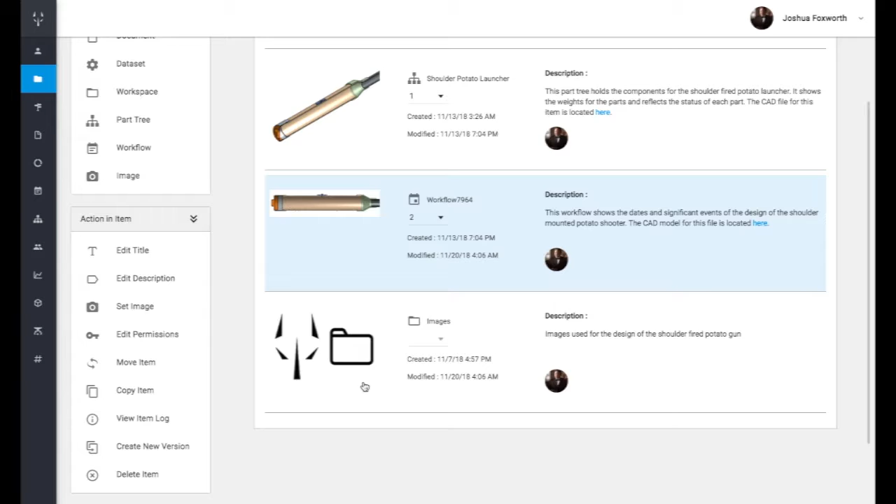As you can see, this is based off of a WikiHow that we've linked to. The WikiHow just shows you how to put it together, gives you some good introductory tips on how to do that. Our design is slightly different because we wanted to make sure that all the items the gun is made out of could be bought at a hardware store. Partly so we'd have the dimensions readily available, but partly just so we weren't just making something up, and you could actually build this gun by yourself if you wanted to.

Alright, so that link is in our description. Let's go over to our Onshape model. This is a really simple item to design.

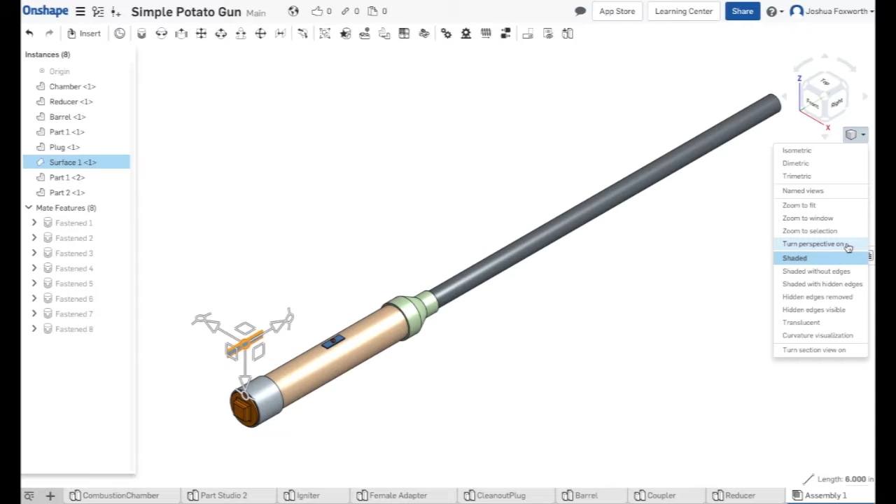We've inserted a plane here, and we'll go ahead and cut this in half by viewing by this surface. In Onshape, that's pretty simple to do. You've just got this surface here, you bring it into your assembly, you go to the view icon at the bottom there, you'll see the proper tab to view a cross-sectional view. So we'll click on that. Nope, I guess I didn't click on that. There we go. So this arrow will let you pull back and forth as to how far from that surface you're actually slicing into the model.

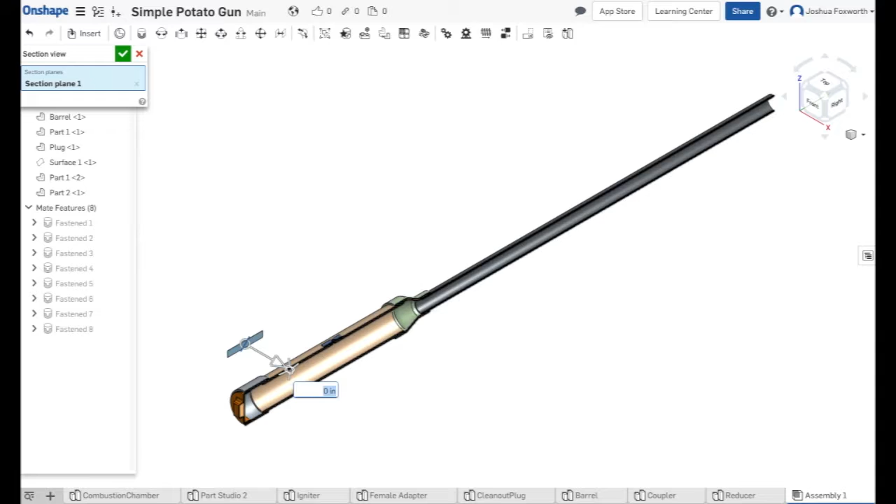Alright, so let's go ahead and set it at the center. Our design is pretty simple. You've got the barrel there at the end. At the opposite end, you've got the end cap, which screws on and off. You unscrew it, insert the propellant, spray the hairspray in, and then screw it back on.

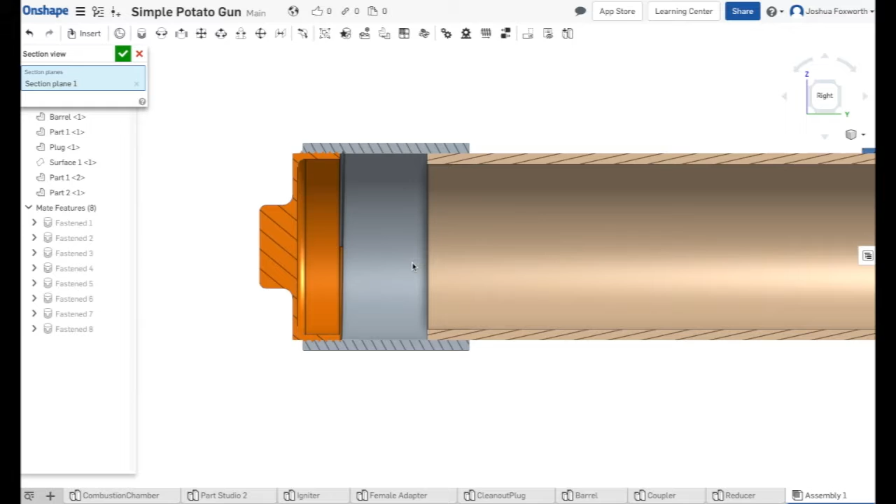See, click on this right there. You can see that it's threaded on both ends. There's that gray adapter that connects the combustion chamber to the end cap. The combustion chamber is in the light brown, the end cap's in the orange. We've got a hole in the combustion chamber for the firing mechanism, and there would be wires hanging down there normally. This is our reducer, the green part there that connects the combustion chamber to the barrel. And these are just glued on, so you don't see any threads there.

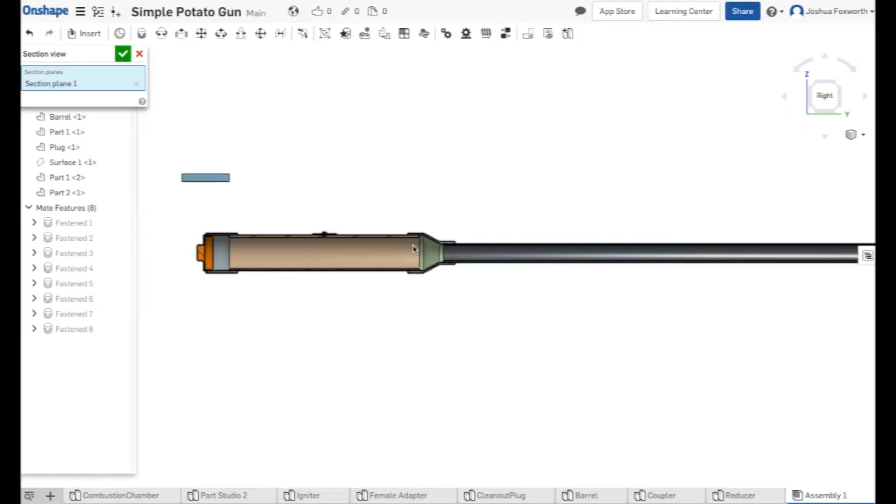PVC glue is actually pretty strong. Shouldn't have a problem connecting the items as long as you let it dry. It's not going to be a problem.

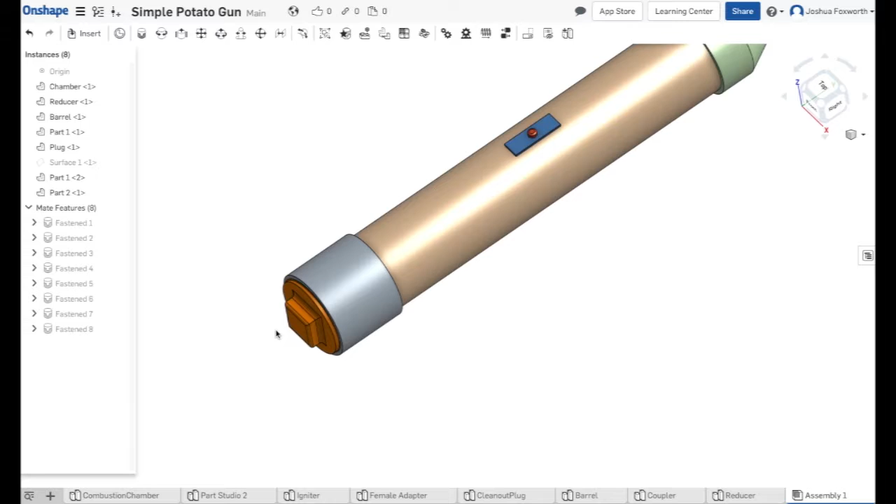All right, so let's go ahead and take away our cross-sectional view, rehide that plane, and we'll go back to look at some of these individual parts. Now, as you can see, we've got that square on there to help you screw it in. These are all store-bought parts. You could go to any Home Depot or something and buy this PVC pipe and then just saw it to the length you want.

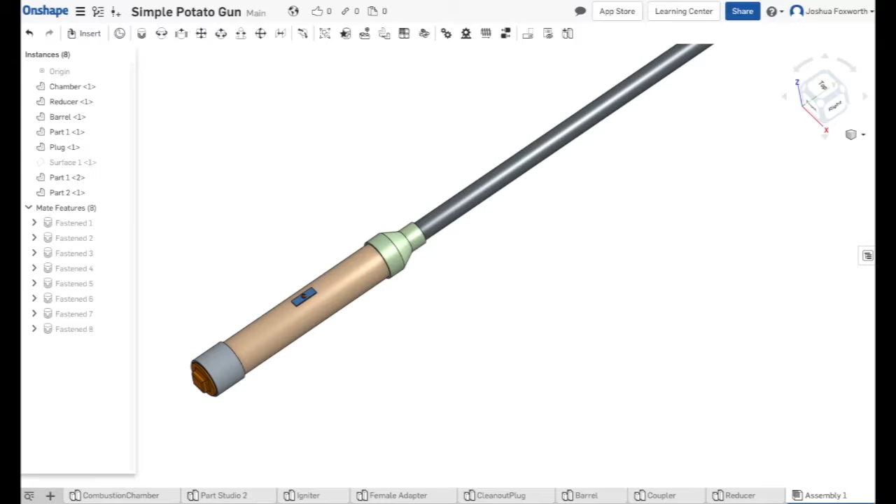So in Onshape, we've got our different part studios. The parts are designed in those studios, and then we've got our assembly that houses them all. So we'll go over to the combustion chamber. It's just a simple tube. There's the hole for the wires to go through.

So we've added some equations at the top here. When Onshape builds a model, it builds top to bottom here. So you want to have those variables at the top there, because what we've done is we made the sketch's inner and outer radius set to these parameters here, these variables. And when we did the extrude, we set it to that length of that chamber there. As long as you use the hashtag, it picks up on it being a variable. So those variables have to be above where you're calling them in that design for them to work.

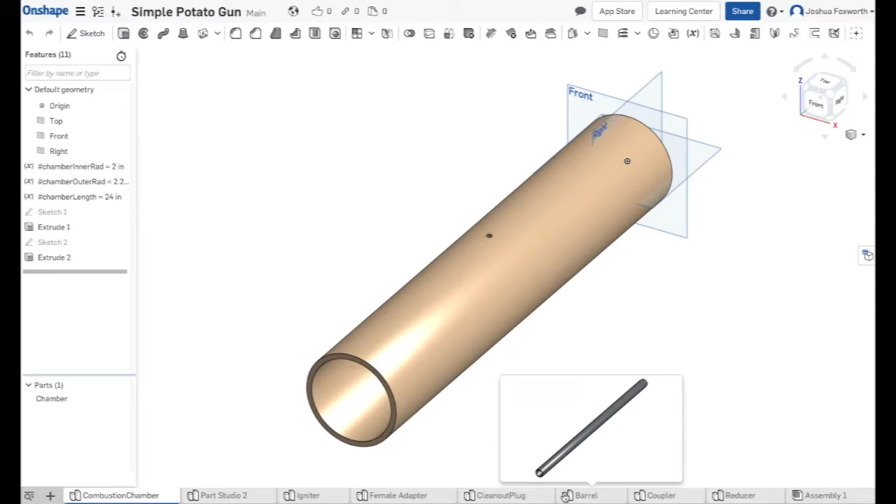This is going to be significant in a minute because we're going to show how we send these variables to Onshape from CADWolf. That's just a closer look at the end cap, so you can see that it's threaded. It's got the notch at the end.

Alright, so there's the model again. Let's put it to isometric. And let's go over and take a look, starting back in the workspace.

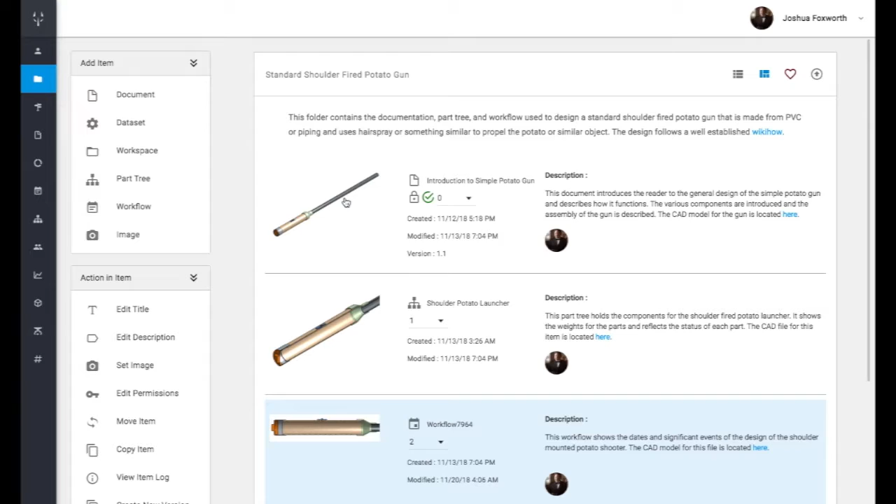So there's a simple document. There's not a lot of math involved with this, it's just simple design parameters. We're going to look closer at the part tree in a second, and then the workflow.

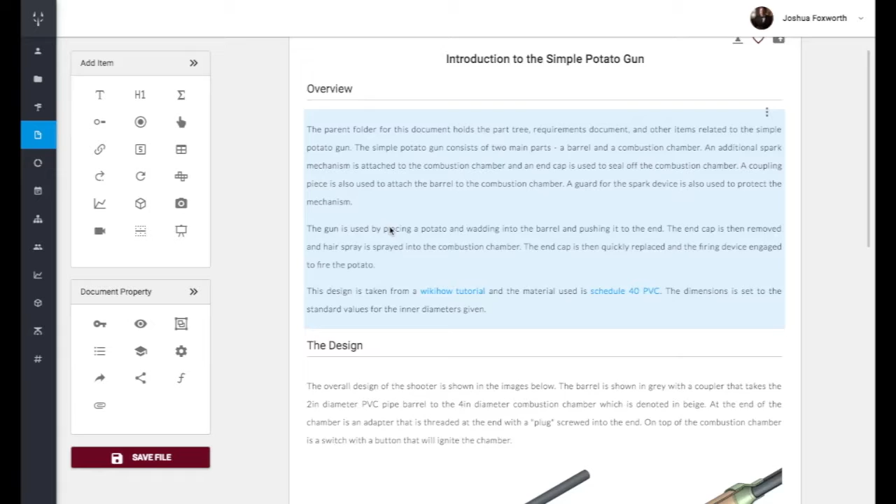Let's go look at the introductory document. As you see, like I said, there's not a lot of math here. We just describe the basic design, give some still screen captures. And at the bottom, you'll see we set the density of the PVC. That's the only item that's going to be pulled into the other documents and used.

If you were doing some heavier calculations, you might have one or more design documents where you set parameters that are pulled in, like factors of safety, that sort of thing. So in our part tree, you can see we've got a separate document for each one of our parts.

And let's go ahead, we've linked these all to the CAD. So as long as you're logged on to Onshape, and these have been set up, which we have, the icons for them will show, and we'll be able to pull in those CAD properties, as we'll see here in a second. The combustion chamber is one, we've set it to there's one of them. And we'll go take a look at that document.

All right, so again, very simple. There's no math. We just set the variables here. As you can see, they've got the same names as the ones in the Onshape document. That's extremely important, because the way this works is we send these variable names to those Onshape documents and elements. We then calculate the mass and weight. Those are the only calculations in this item.

So here's our window over here to the left. As you can see, we're importing PVC density from that main document. The way we did that was we simply looked at the path of that document. We're in the projects workspace, hit enter, it gives you all those folders. Then I clicked it twice, okay.

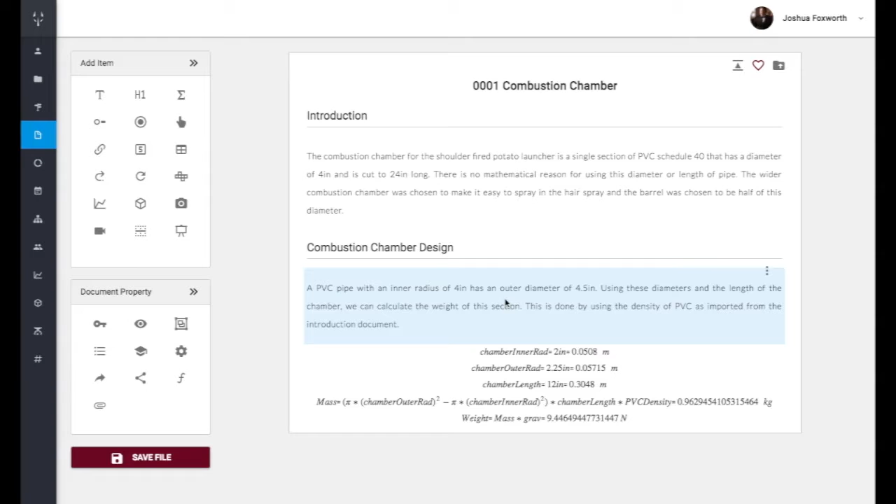We hit the save button. This will sometimes take a few seconds if you're sending a lot of parameters to Onshape, because you're waiting for them to get that response to Onshape to show that everything was okay. So there we go. As soon as we clicked over it, it was already updated. The length of it was cut in half.

So any variables that were affected by that redesign would have updated also. We'll go back to the part tree and you'll see this. All right, so we'll re-enter the weight. And as you see, that value is less than it was before.

So there it was before. It still hasn't updated in the CAD, or we haven't pulled the updated values from the CAD model. So we'll pull those, and as soon as we get the response from the Onshape models, it looks to be matching up. All right, so that's a basic introduction to how a redesign would work.

If we had changed the diameter of that combustion chamber, you see this red here, it means it's basically telling us, hey, these items depend upon something from that file, and that file has been changed, therefore you need to update these files, which you can do from here.

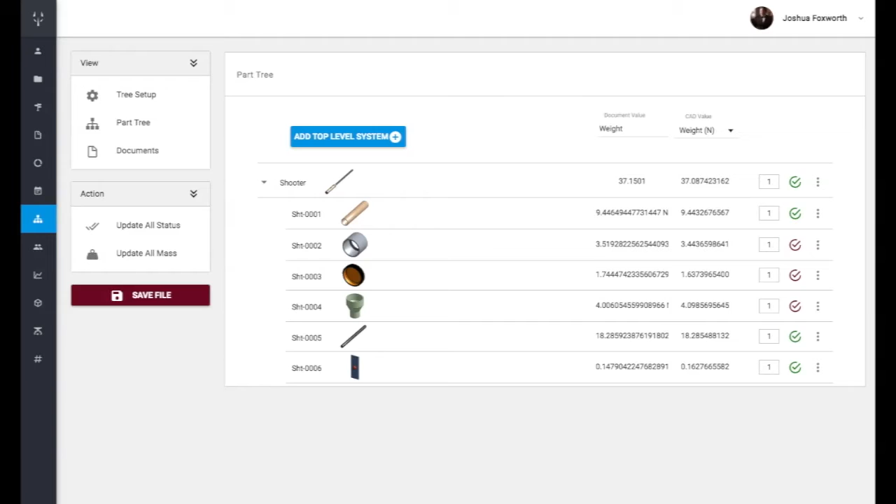But I know, obviously, from designing this, that if I change the diameter, then I would have to go back and update these other related components. But since I just changed the length of that chamber, it's not important.

Looking quickly at the workflow, you can see that the save icons show you when it's saved. You can go in and change this to see when things were saved or created. So this is just the createds now. It's a little bit cleaner to look at. The events all apply to all, so they cross all of them. You can click on it and get a brief description of what that event was.

So basically, we've just created an event to show, hey, this is when we designed it, this is when we did the testing, this is when we built it. There's a little gray event there for barrel redesign.

You can add new events there if you've got edit permissions. This will look different if you don't have edit permissions, but I just wanted to show you what it looks like when you have edit permissions. You can assign these events to all items or to specific items. You can give sign-off, create roles, and assign certain people. All this is available in the workflow documentation.

I just wanted to show basically how this works, that you've got some events, you apply them to certain things. This helps you keep track of who's doing what and what's been done to what item.

And that's basically it for the workflow. This is a pretty simple design. There's not a lot going on with it, so we'll leave it at that. Take a look at the other projects if you want to get into something more complicated.